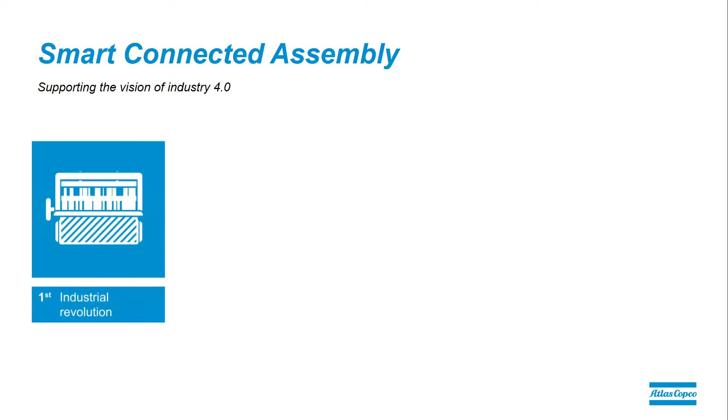Before we can go into any specific concepts, I think it's important to take a step back, because to understand where we are going, we need to understand where we are coming from. As many of you know, Industry 4.0 is a term representative of the fourth industrial revolution that has already begun, and we're seeing it now in its infancy stages. But how did we get here? How did we get to the fourth industrial revolution? Let's take a step back.

Let's look at the innovation through history that has been driving us to this point, starting with the very first industrial revolution, marked by a shift from people making things as individuals inside their homes and in one-man shops to factories and mass production that utilized special purpose machinery powered by steam engines. This enabled the second industrial revolution, which we're probably all most familiar with, as we still live and breathe in assembly lines today. With this second industrial revolution came mass production being further enabled by the assembly line.

The third industrial revolution took that assembly line and mass production and introduced electronics and IT to further automate production processes. This third industrial revolution is really where we've been since about the 1970s. And that brings us to our current state. Experts are saying that with the potential of things like connected devices and big data, the fourth industrial revolution is here. What this fourth industrial revolution will bring is the use of cyber-physical connectivity, systems that will now truly digitalize mass production with their use.

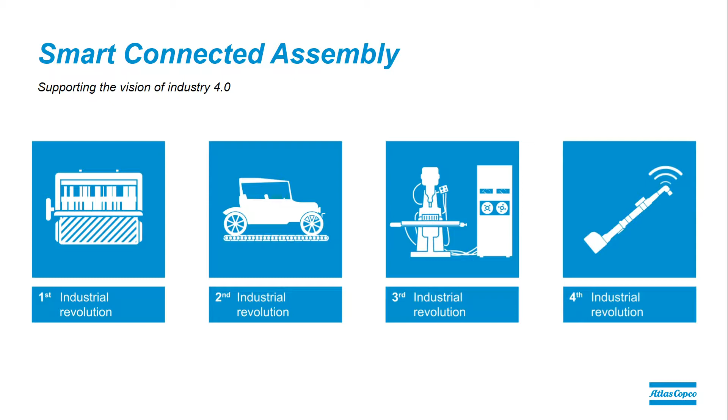When looking at smart or connected devices, Atlas Copco has more than a decade of experience delivering smart devices, and today we have more than 15,000 wireless tools in operation. With this, we've gained not only knowledge in how to design and produce smart devices with battery and wireless technology, but maybe even more important, we've gained the knowledge of what it takes to actually deploy this technology and get it up and running to meet our customers' production demands.

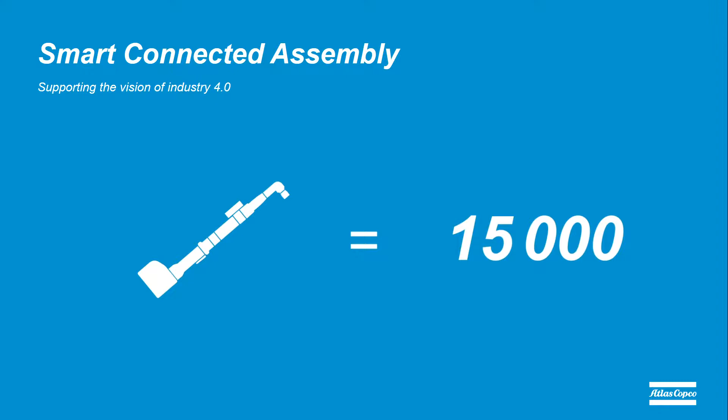Going one step further beyond connected devices and into the big data realm, we look at our 15 years of experience in data collection and analysis with over 60,000 connected devices, which has allowed us to gain insight not only in how to develop software for data collection with the right communication protocols, and then optimize the user interfaces, which is something we've done with our latest generation data collection software, but this has also given us the knowledge to understand what it takes to maintain data over time with archiving and upgrades and the analytical tools that are needed to really make sense of it all.

So between our over 15,000 smart devices already in production today and our over 60,000 connected devices, we have a solid platform both in product and in knowledge base to stand on today, but also to build on for the future.

Which brings me to the future. Other than wanting to move into Industry 4.0 with all our devices connected and reporting to each other, what else is there to look at? Are there other important factors to consider? And I think the answer to that is, of course, yes. There are industry trends and needs that we have to take into account as well. We see four key components that will drive our customer strategy in the future of manufacturing, and will in turn drive our strategy too.

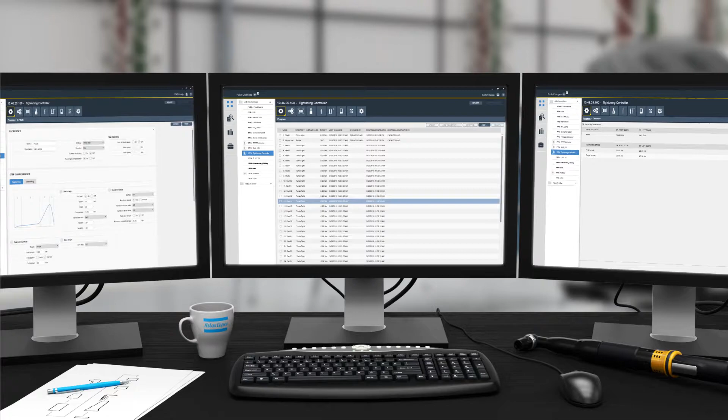From the configuration software now, let's go out to the plant floor level and take a look at this overview we have here, where connectivity and real-time control of the assembly process is brought to life through our next generation tightening controller, the PowerFocus 6000.

This controller operates as a fog node, which essentially means that it allows for the connectivity and real-time control to happen closer to the physical proximity of the tightening.

In addition to that, this controller is capable of having multiple virtual stations. So instead of a hardware box running one-to-one tools throughout, a virtual station provides the necessary process control in the station. This concept of virtual station eliminates the need for the hardware in each individual station.

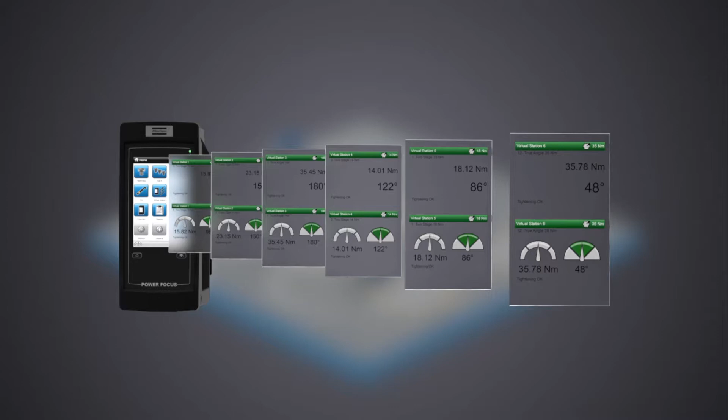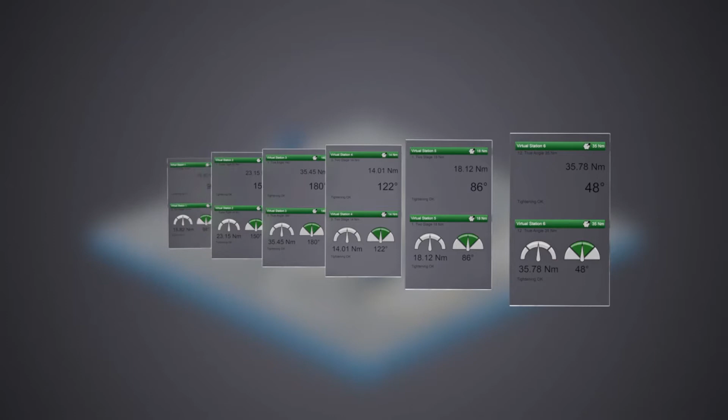These new wireless stations can be added simply by adding new virtual stations onto existing control boxes. What we're illustrating here is this virtual station concept now being brought down to the station.

And when you show all the connectivity of the entire assembly line together, we see that we represent a change from value created by boxes and cables to now software and wireless smart devices, which is pivotal in supporting Industry 4.0 and is a cornerstone, like I said before, of our smart connected assembly.

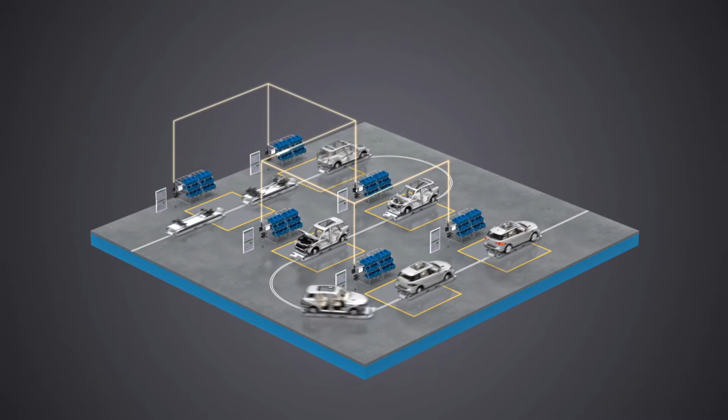And what we're representing here with this graphic, you can see in the white lines going up from the stations and the lights moving around, it's symbolizing the data transfers that are happening. So the process control is happening at the individual virtual station level while the data is being pushed back up and being recorded in a traceable level.

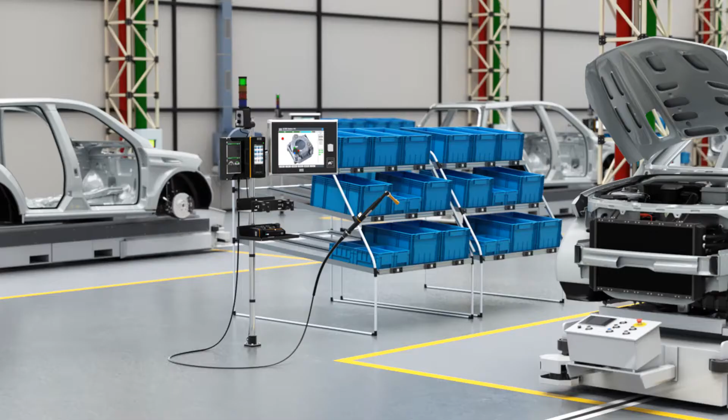Let's go now from the plant floor level that we were just at to a station view and explore how our products bring to life our 6 pillars of value.

Superior productivity has long been a value pillar of Atlas Copco. The PowerFocus 6000 is the latest generation of tightening controllers from Atlas Copco. With this new platform, we focus on various value pillars, but specific examples given here include new product introduction, reduction in energy, and human interaction.

With regards to new product introduction, the system's capability to add and move around virtual stations instead of physical boxes means faster, simpler, and less expensive rebalancing when our customers are introducing new products. And within that same regard comes reduction in energy use. With the use of virtual stations, there's less energy used by the actual physical boxes consuming electrical energy.

And then we move into human interaction. The new interface on this controller has been designed to assimilate to what most operators and users would be used to now with smartphones and tablets, easing use and also making it more efficient as far as training and things of that nature go.

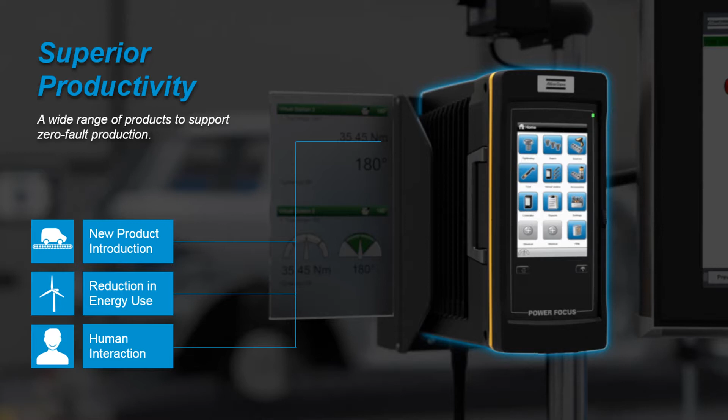Going now down to the tool level, we look at the Tensor STR series, which is our latest generation of corded transducerized tools. Some value this tool brings is with use of a physical sensor in the tool, we're able to introduce a new angle monitoring strategy called True Angle. This strategy is able to reduce common assembly problems by eliminating operator influence on the tightening and giving an actual true angle readout of what was applied to the joint specifically.

And if we look then at improving productivity, we've put a faster motor with better heat dissipation, which should reduce cycle times in most applications.

And then going into human interaction, another new strategy we've implemented with this tool is on the tightening side, called Turbo Tight. What Turbo Tight does is it's an algorithm that is able to reduce reaction force and in some cases reduce the need for reaction arms altogether.

Other things you see on the tool here is what we call an EHMI. Down at the bottom of the tool towards the reverse ring, you see an indicator for the operator getting readout and feedback as to the results of the tightening. And then at the end of the tool are rotaction sockets, which are sleeved sockets to protect from injuries due to entanglement.

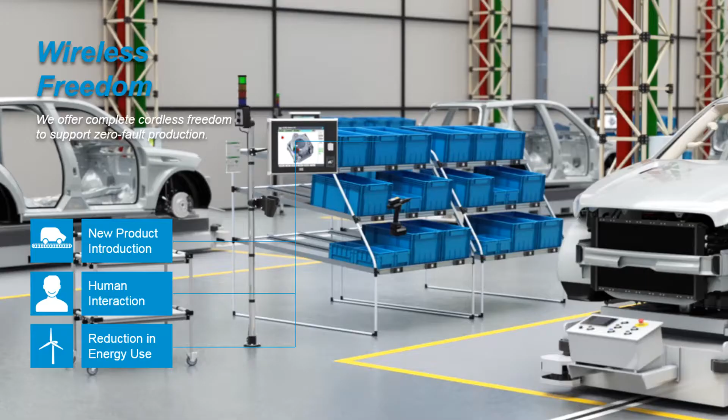Moving on to another technological trend, which is towards wireless devices, let's take a look at what we have to offer in this product range and talk about what values you can gain through wireless freedom.

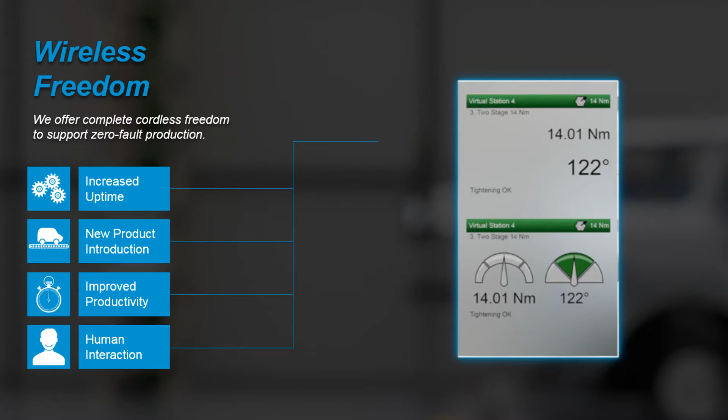We've touched on the virtual station capabilities of the new PowerFocus 6000 a couple of times already, and this just reiterates that you can expect increased uptime, ease of introducing new products more quickly, improved productivity overall, and an increase in human interaction with the systems through these virtual stations.

Going now to the actual battery tool themselves, our wireless battery tool range, the Tensor STB tool itself, brings value by increasing uptime, improving productivity, and helping customers introduce more products more quickly. Really it's doing so by being a battery tool itself, so not having cable management to worry about, lending itself to more flexibility and accessibility for operators when actually using the tool, being more compact and low weight compared to fighting with a cable on a tool, things of that nature really lend themselves to these values when put in use.

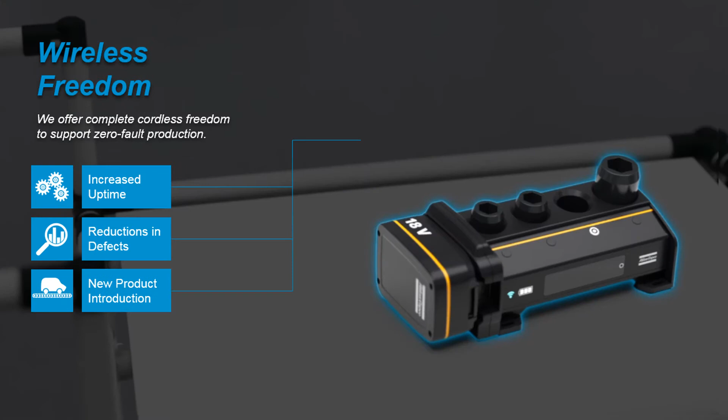On that same note of reducing defects, we can now look at one of our error-proofing station solutions, what we call a single quality station. What this solution really looks to do is help increase uptime, reduce overall defects, make it easier to introduce new products, and give a better human interaction experience with the process in general.

When we talk about increasing uptime, one way this system can do so is by putting inline rework right within the screen, so that if a defect happens or something happens in the operation, the part doesn't have to be pulled offline and completely taken to a separate area. It can be done inline now.

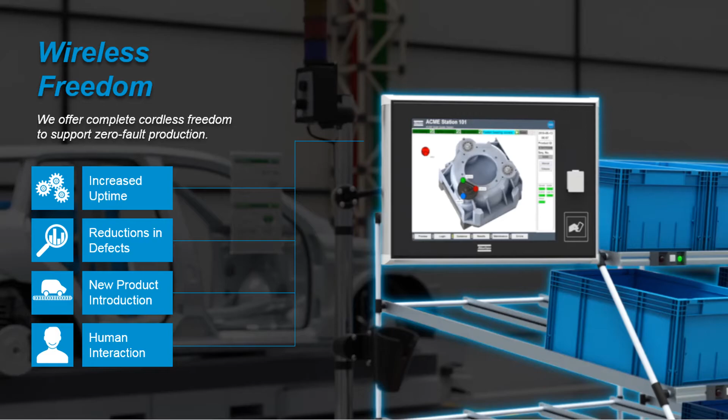Going beyond production, we offer a wide range of quality assurance equipment that also aligns with our 6 pillars of value, and we'll look at a couple of them here.

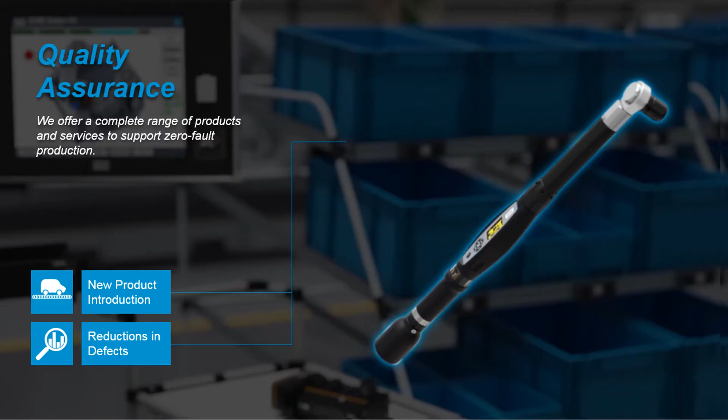Looking first at our ST wrench, our digital torque wrench. This is a modular and compact design for quality control to check residual torques, perform joint analysis, including joint behavior and joint stiffness. It's also great for prototype builds or low production volumes when accessibility is limited.

Going beyond quality assurance equipment just related to joint quality, we now look at machine capability, which can be tested with our ST bench quickly and easily under real production conditions without actually having to interfere with production.

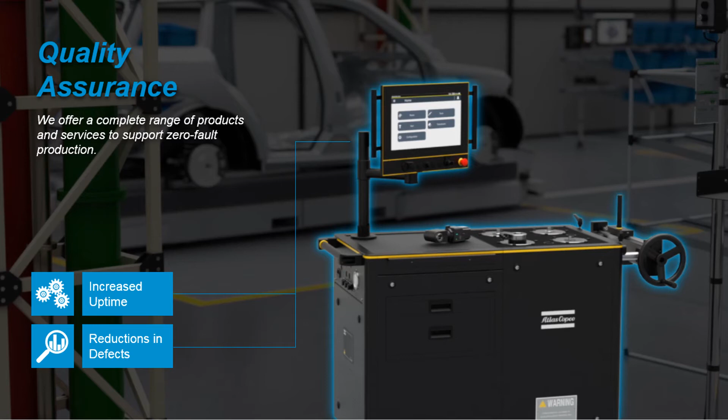Which brings all this to data collection. The output from all those connected devices we've talked about so far today is the newest raw material, data. I've read some industry articles that are changing the adage from cash is king to data is king, or data is gold. Data historically has been used for traceability purposes, and while that's still very important, how we use this data to actively analyze and optimize our production systems in the future is really what is going to take data from being a raw material to a tangible asset like gold.

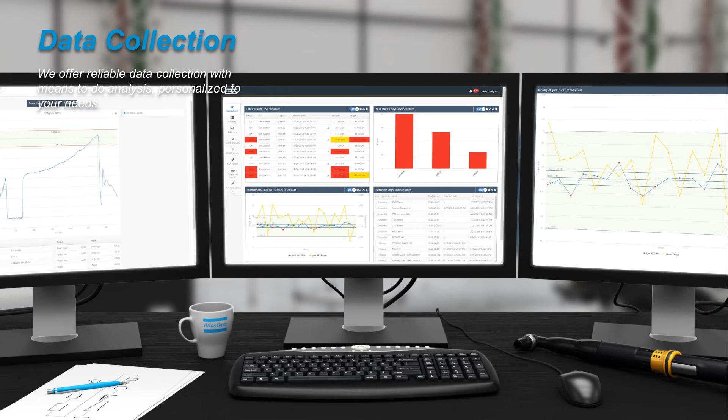And in doing so, our customers will realize values like increased uptime, reduction in defects, new product introduction, and improved productivity in human interaction. Having proper data collection and also being able to analyze it and get a quick output from what all this data means is what is going to give you all those value drivers.

And then finally, looking at service, because all of this equipment does us no good if it's not installed properly and kept running and optimized on a regular basis. So from a service perspective, we have a complete range of offerings that support smart connected assembly in these 6 pillars of value we've discussed today.

I'll start in the beginning there with startup services. With this service, you can introduce new products more quickly with the help of our trained technicians, and you can ensure that you're optimizing throughput right off the bat while also minimizing potential defects that come off the line with the correct setups.

You then move into maintenance. Once the equipment is up and running, we need to make sure it's maintained properly. Asset utilization becomes key after startup. You have to ask yourself, how will you keep the plant running? Atlas Copco offers a full range of maintenance options that are available to help you increase uptimes through properly maintaining all of your equipment.

And then finally, moving into optimization. Once everything is started properly and has been maintained, we want to make sure it continues to run properly, but also optimize it to make it better than it was the day before. We offer a full range of services and solutions to help do this as well.

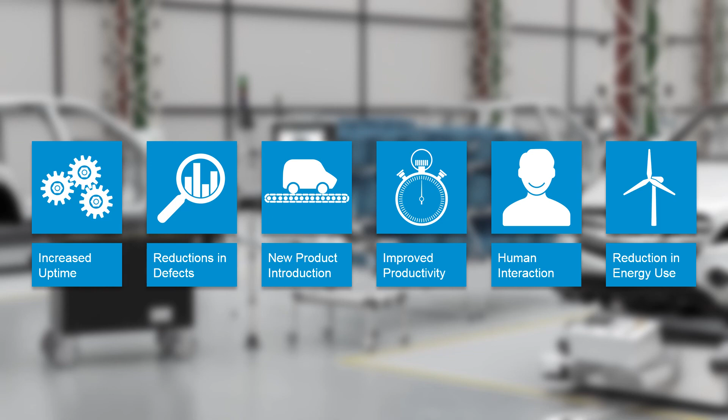And this is what we call smart connected assembly.

Before we end, I want to leave you with a final thought, which I wish I could say was my own original thought, but it's actually inspired by a Microsoft commercial I saw during this year's Super Bowl. It's narrated by Common, in which he says, 'It's not about what technology can do, but what you can do with it. You're the voice, and it's the microphone.' And at the end of the commercial, he asks, 'What will you do with it?'

And I think that's a really simple question, but at the same time, it's something that we're all working towards as corporations and then individually as well, to understand what will we do with all this new technology available to us? How will we use it to make our companies better? And the journey to answering that question is something that Atlas Copco wants to be a part of. I hope it was brought to life here with the presentation today with our Smart Connected Assembly concept. And we look forward to working with you in the very near future.